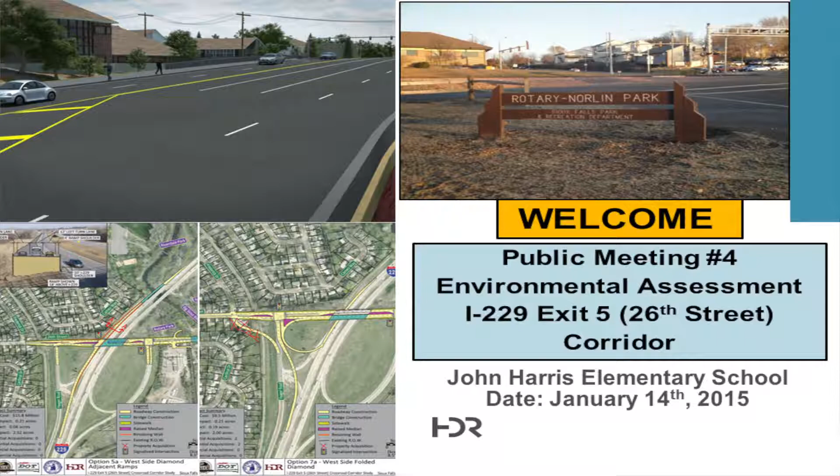Tonight's presentation isn't going to be as long as the last few meetings, but it is going to do kind of a recap of the process that we've gone through. I think in March, we began in 2012, so it'll be about 3 years. We'll kind of walk through the whole process, but the main goal tonight is to share the final findings from the environmental assessment and announce the preferred alternatives as we move forward.

Like Chad said, there are several folks here from both the city and DOT to answer any questions that you have. We are in the formal comment period for the environmental assessment, so if you do have a comment, certainly I'll take some general questions when we're done, but those comments we want written down because we have to respond to those. We'll actually write a written response to you and send you a letter with those, and also include it in the environmental assessment. So again, thanks everybody for being here.

I'm just going to hop into the timeline as a little refresher for everybody. The project began in March of 2012, and most of 2012 we did data collection, we started on the traffic analysis, and we had our first public meeting in the mid part of the year. At that public meeting we shared several goals, asked a lot of questions, and shared some results from the online survey that we had. But it was really our first time to get some feedback on an area of town that many people are frustrated with. So we appreciate everybody that's been here from our first public meeting.

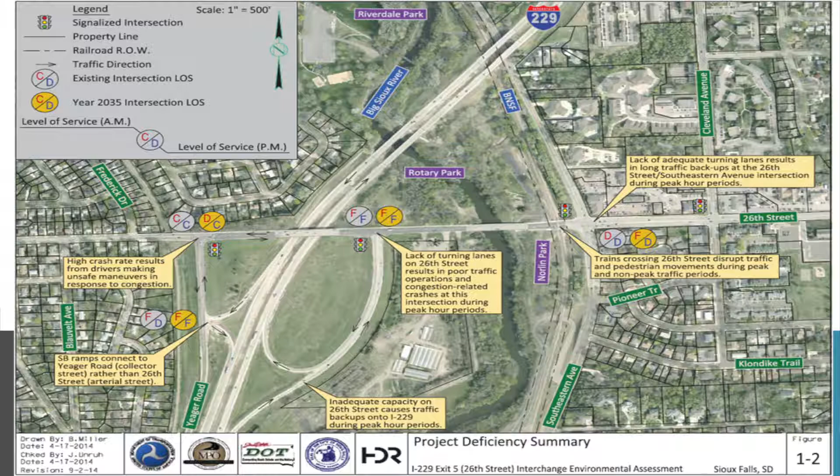In this location over here, we have one left turn lane that goes onto the interstate, the other one goes through. We have a lot of people jockeying since there's only 2 lanes to get through that area, so we end up having a lot of crashes. Some of that's due to the lane configuration, some of that's due to the congestion and capacity in that area.

So that was one of the items. Certainly the ramps connecting onto Yeager Road versus connecting onto an arterial. We don't have that in Sioux Falls. This is about the only location where we have a connection from an interstate system to a collector road. So that's something that we want to solve with this project.

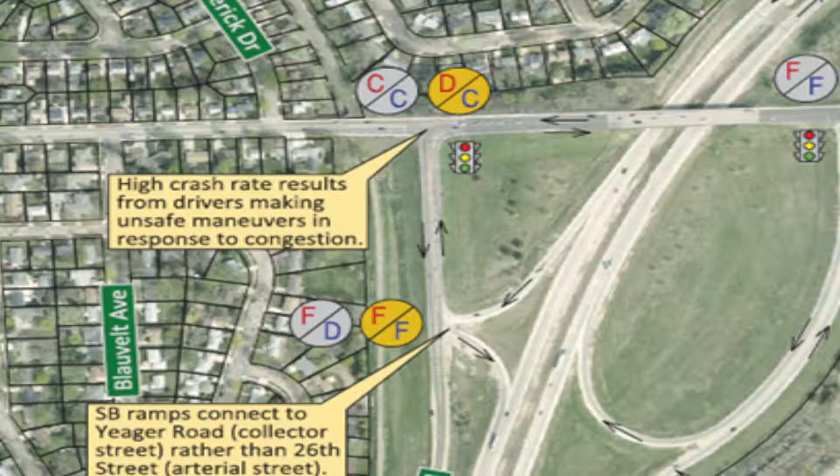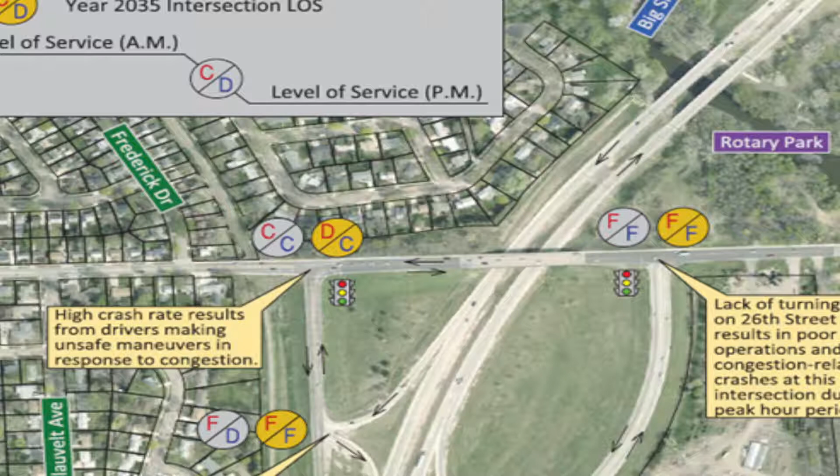Another thing that people see, especially in that evening hour, is the capacity on the ramp. If you're coming on 229, a lot of nights you see those lights all the way backed out onto the interstate, and that's something we need to fix. That can cause some serious accidents. So how do we manage and build capacity in this area, add the turning geometrics that we need to start clearing traffic off that ramp?

As we move over to the east, trains crossing 26th Street are disrupting traffic throughout the day. Certainly when they come and hit those peak hours, that's of serious concern, but they also come in other hours of day, disrupting that traffic. And I see our city traffic engineer standing back here, but if they come through in a peak hour, that can affect traffic operations for almost 40 minutes. So that's significant for people crossing that side of town.

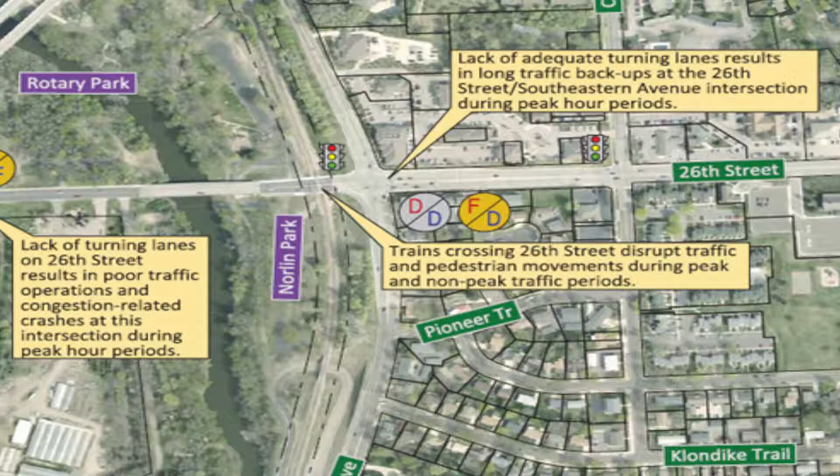And finally, as we look at improvements at the interchange, if we don't make improvements at 26th and Southeastern, it doesn't do us a whole lot of good. We need to make sure that as people are on that corridor, they can go all the way through as commuters and people that use the corridor and have a relatively safe experience going through there with additional capacity.

So from those deficiency summaries, we popped right into our purpose and need. We use those to develop what we need to account for with this project. So we'll walk through those: improve the existing interchange configuration, provide grade separation. As we talked about in the second public meeting, we need to satisfy these goals. They're not just put out there as we determine alternatives and create a new layout for this area. We've got to make sure that we satisfy these. So provide the grade separated crossing, improve traffic capacity at 26th and Southeastern, and finally, consistency with the long-range plan.

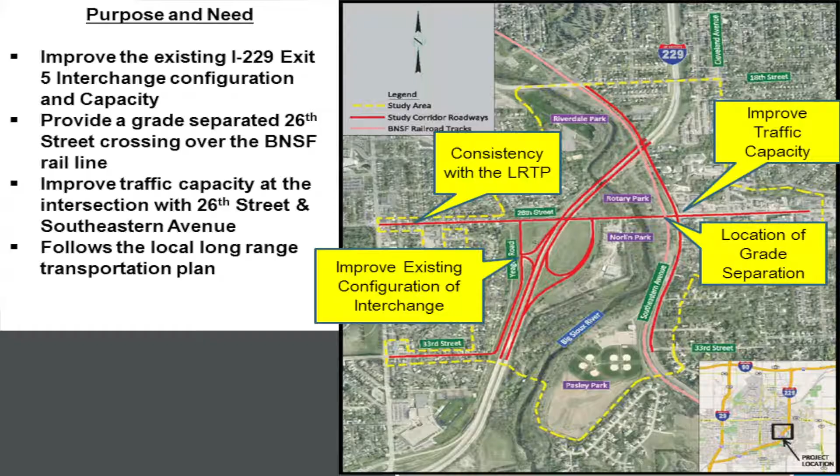And interestingly enough, we had a lot of folks come to our second and third meeting that were really wanting the extension of the 4-lane section over to Cliff and even farther through town. And no one disagrees that would take more traffic. But one thing the city does is develop plans on where roadway improvements should take place and where they might be detrimental to housing. This is an area that really starts over on Kiwanis Avenue and comes all the way across on this corridor, and they identified this as a location where they didn't want to create those 4 lanes for the sake of the single-family homes along those corridors. So those are our main purpose and need statements. We're going to keep going.

At our second public meeting, we brought those options forward. We had 13 options that we brought forward, and after the meeting, from the comments received from the public and off of the website, we created 7 additional concepts. So at the end of the day, we evaluated 20 different options against each other at the interchange. Quite a few, common for a project like this when you're looking at all the potential fixes out there. At 26th and Southeastern, we brought 6 options to the public at that meeting. We didn't have any new options come out of it, but we did have quite a few refinements based on comments from the public, so we appreciate that.

Evaluation of concepts stemmed around these items in relation to the environmental assessment. The purpose and need. As we created this matrix, and this is just a small caption of what it actually is, it's a long page where all of them are compared against each other: is the interchange standard for this area? Are future traffic needs being met? Is grade separation in accordance with the City of Sioux Falls policy? Is the option consistent with the long-range plan? How are property impacts taken care of out here?

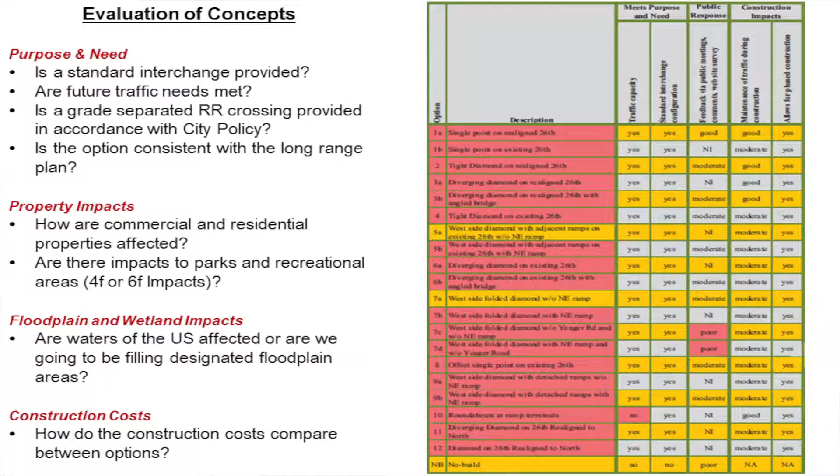At that same meeting in February, we talked about alternatives that were going to be carried forward. And this is kind of the first time you'll see on the layouts here tonight where you're seeing a mix. We have 5A and A. What that means is we've combined the interchange layout of 5A along with the intersection layout of A. As far as the environmental assessment, we need to make sure that we see the full picture. And we did that, and these boards show you those options together.

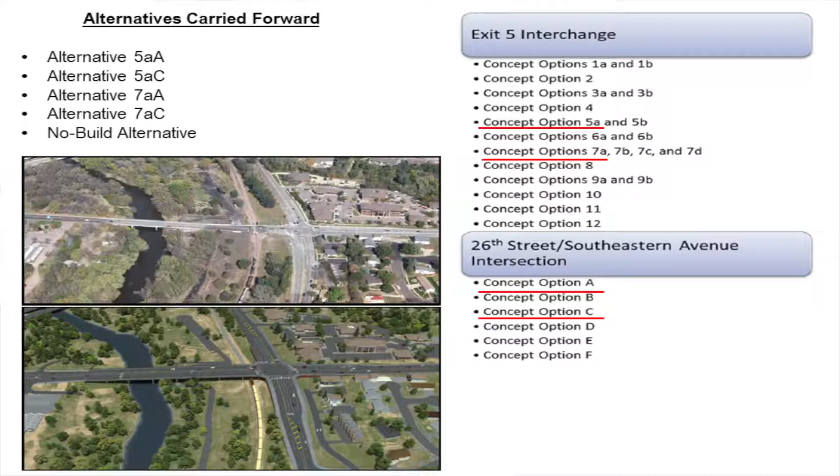From that meeting, we carried alternative A, 5A and 7A from the interchange, and we carried from the intersection A and C. As we go along, we're always considering that no-build alternative, as that may be the alternative if we can't find a solution. So underlined in red, these are the ones we carried forward. Now I'm just going to quickly run through the benefits and the drawbacks of the options. These are just captions of the layouts that are over there.

This is 5A and A, so this represents our west side diamond interchange where we have the ramp that begins and is elevated by Cameo Way, comes up to the intersection here, and then the ramp goes back on to get to the interstate. This side is relatively the same. We didn't recommend any improvements to this long ramp because we need that length to receive the dual left turning movements that we'll have at that ramp. So we didn't look at consolidating it because we need that length for the 2 lanes to merge to 1 as they go on to the interstate.

But just a few benefits. Certainly this one will serve the traffic demands that we have forecasted and what are existing. These options, specifically because of the longer bridge we're using, have minimal impacts to the Big Sioux River floodplain, actually some improvements, we'll talk about that. We have minimal widening west of Yeager Road, and we point that out in regards to consistency with the long-range plan. And this option allows for grade separation over the railroad. So those are some of our benefits.

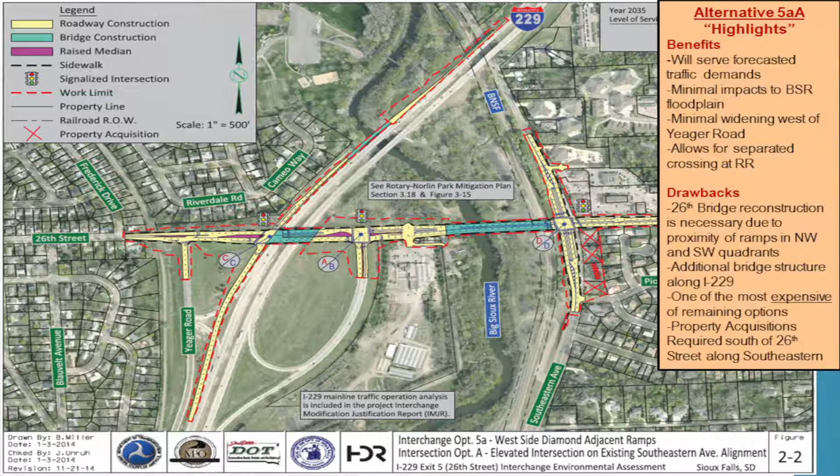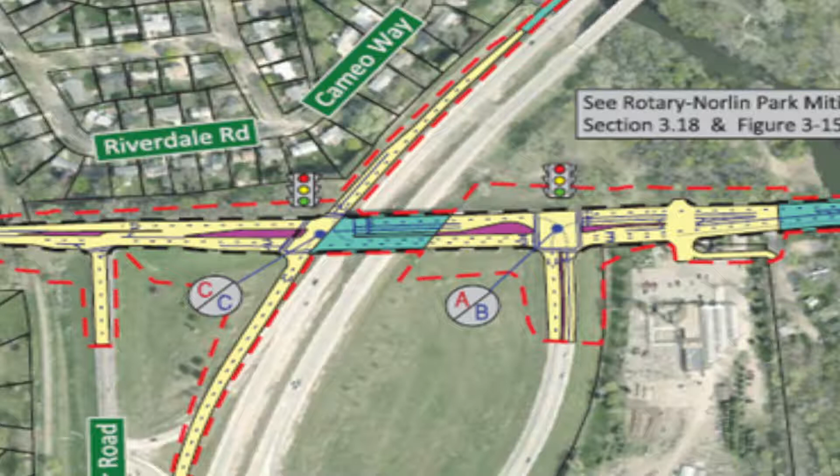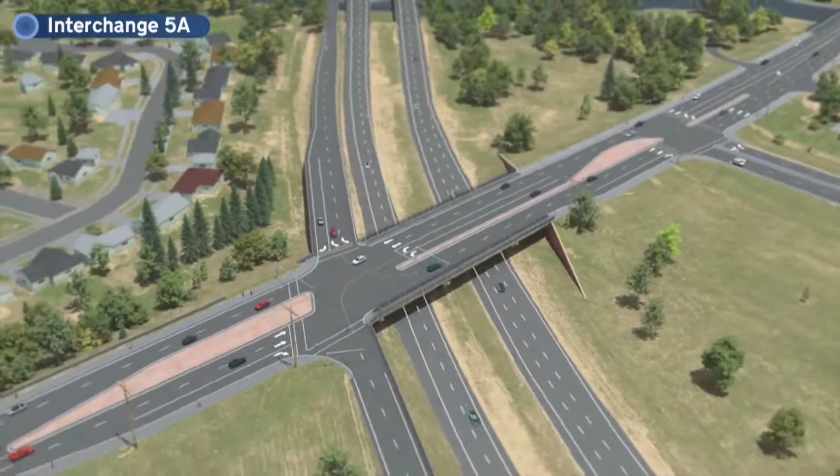Some of the drawbacks, and they relate back to cost, but this bridge right here in 5A, we have to totally reconstruct that bridge. It's not that old. Certainly when we do these projects, we try to expand them if it's a type of bridge that we can expand. But with the angle of the ramps and how they're tied into the bridge, we can't make that work with the existing bridge, so we need to replace it. The other item is the bridge that we need to construct here over the Big Sioux River. We're calling them drawbacks only because they increase the cost of the project. So when we look at the screening matrices in the comparison, that's a big cost.

I'm just going to go through. When we look at the bridge location here up to the interchange, if you remember from the last public meeting, this was kind of the wall. I don't have it up here as a drawback really, but for the folks along Cameo Way, if this option were selected, this is the view that they had. We had concerns with drainage going down the interstate right-of-way. Certainly visual impacts were concerning to them. So we had some other issues if we went with this option due to this wall.

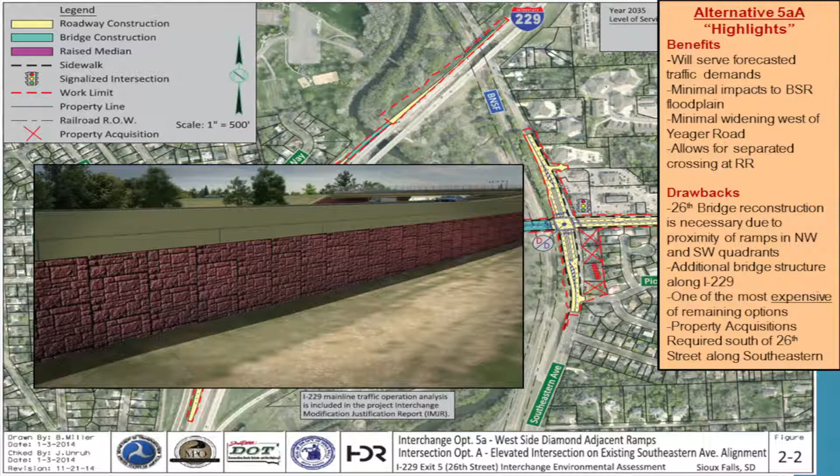And finally, certainly a drawback to any option is if we have property impacts. In alternative A for the intersection, where we keep Southeastern on alignment, we have 2 commercial properties that would be impacted and about 7 other residential properties that would be impacted. So those are certainly drawbacks.

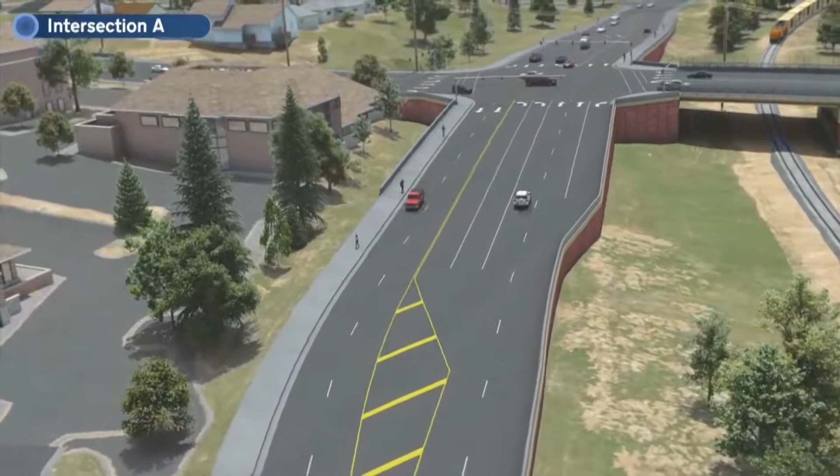We're going to go on to option 5A here. Anything that we talked about on the last slide is consistent, but now in this option we're looking at alternative C, where Southeastern is off alignment. It's pulled closer to the railroad. And so a couple items here. This top one is certainly true.

Forecasted demands we meet. Minimal impacts to the floodplain, again, because of how we looked at the bridge design. But we looked at another benefit as being redevelopment opportunities in this southeast quadrant. And the other thing is the additional separation that we get to these businesses. I'm going to stop this at a few locations, but this is the animation for intersection C, and I want to point out why we believe they're benefits.

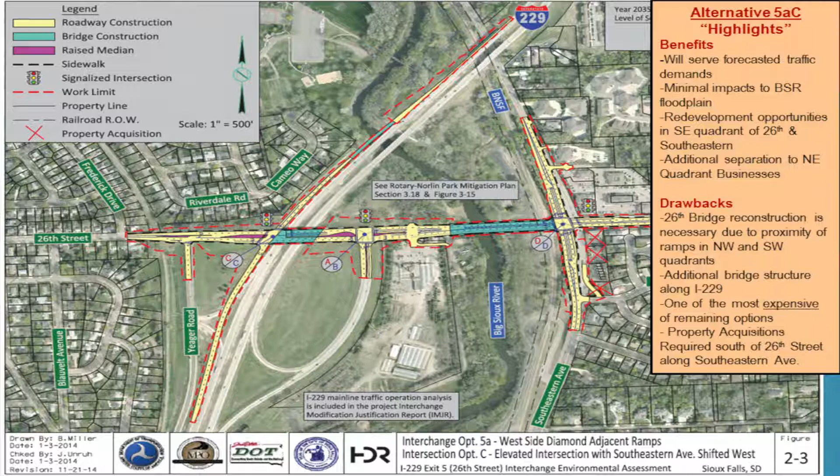Okay, at this location specifically, in option C, we create a large amount of green space. If you're the business owners in here, on option A, that retaining wall runs right along their property. So when we create additional space in here, we can also adjust some of the visual impacts. By providing additional green space during preliminary and final design, we'll look at reducing these walls, making it so the road doesn't appear to be right on top of those properties. That's a benefit. Now we'll keep going and talk about the other quadrant.

Okay, I'm going to stop it right here. At the last public meeting, we talked about the benefits of alternative C, being able to provide access to all of these properties. That was one of the benefits we had. As we go through the process and start carrying forward alternatives, that's really where we take additional time to dig into all the other things we need to take into account.

One thing we learned as we got into the carry forward stage is that we have a sanitary sewer line that runs down 26th Street. With a fill of about 25 feet in this area, we don't want the sanitary sewer in that location because we'll never get back to it. It'd be very difficult. So we needed a place to put that sanitary sewer, and the only available option was to come through this area. That was an impact we didn't anticipate right away. We thought we'd be able to keep all these and build the walls, but as we looked into utilities, that wasn't the case. So we started thinking maybe we won't be able to save these commercial properties like we originally hoped.

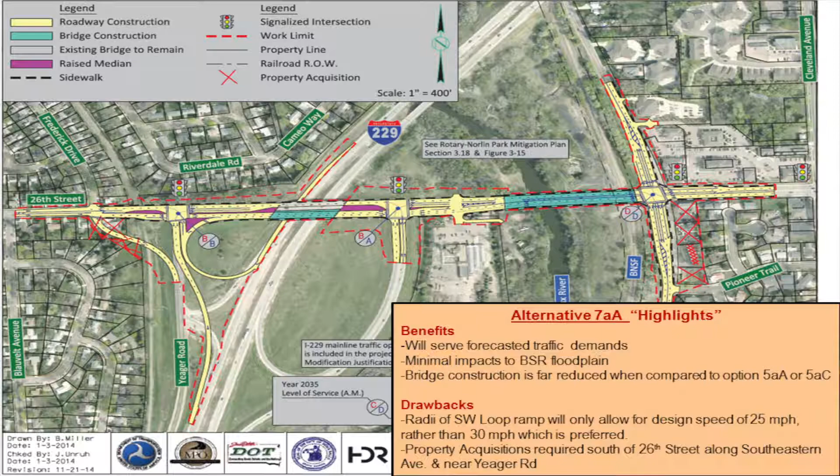Some of the drawbacks of this design, and we talked about this at the last meeting, is the radii of this loop. We say it's a drawback primarily because if the DOT were in a rural area and had the opportunity to build the interchange exactly how they wanted, they'd make that loop a little bit bigger.

Okay, we're in an urban area, we got homes, we got all these things that we're trying not to impact. And they're very common to be this size and even much smaller. Rice Street, the ramps up there are much smaller. Various areas around town they are.

So one thing I just kind of wanted to point out is this yellow portion here, that's the ramp that we're looking at. The orange portion is if we increased it to 250-foot radius versus the 190. And what happens is we start getting in with the Yeager Road relocation, we start getting into more property impacts in this area. And we don't have any information that would indicate that that ramp would really work better than the one we're proposing.

And we've done a lot of study on it and worked with the DOT. So we're comfortable it'll work. Certainly, by keeping it tight, we have less property impacts than we would if we widened it out. But the other drawback is by making this connection with the Yeager Road, we do have two property acquisitions that are required here and two partial acquisitions. So that's certainly a drawback.

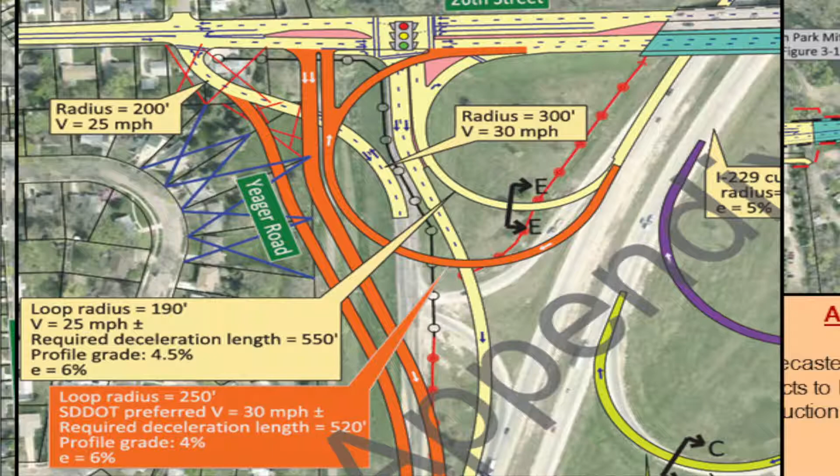Alternative 7AC, so all of the items that we talked about still pertain here. And really everything we talked about in the last option in 5AC pertain here. So this option, no different. We still have really just the condos that would be able to stay in that southeast quadrant.

Now I'm just going to kind of take you back and say, okay, how does this all fit together? Well, in relation to the public meetings, public meeting 2, we announced that the project was being transitioned from a corridor study into an environmental assessment. And that's something we didn't know when we had public meeting 1.

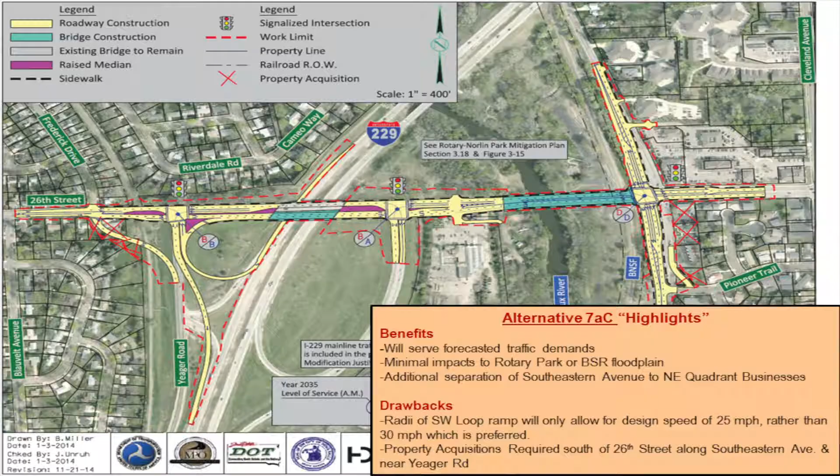And the reason for that is the city and the DOT knew that they wanted to begin with improvements shortly after the study. And if we'd have done a corridor study and completed that, they basically would have had to start again on the environmental assessment. So they kind of just changed things up and we took off with the environmental assessment.

So at public meeting 2, the items that we covered were the approach and scope. We brought a purpose and need statement, and we showed you alternatives. So that was kind of the first steps as we build up to completing the environmental assessment. Public meeting 3, that's where we came back with the screening matrix and talked about the evaluation of the concepts. And so finally with public meeting 4, we're at the selection of the preferred alternative. And so we're kind of getting to the top of our pyramid here.

Really, we'll take the comments that everybody has from this meeting during our comment period of the environmental assessment. We have to ensure that we respond to all those. And then finally, we would ask for signatures from DOT and Federal Highway for the final approval of the study. These are just some environmental assessment summary boards. For alternative 5AA, we have 7 acquisitions, 7 residential and 2 commercial.

Noise, we spent a great deal of time with noise. We had our noise boards in the back at the last meeting and kind of went through those in great detail. But if you want to talk about the noise, certainly grab me afterwards and we'll go back through it. But what we found out is in this area, due to the urban nature, the noise really wasn't changing.

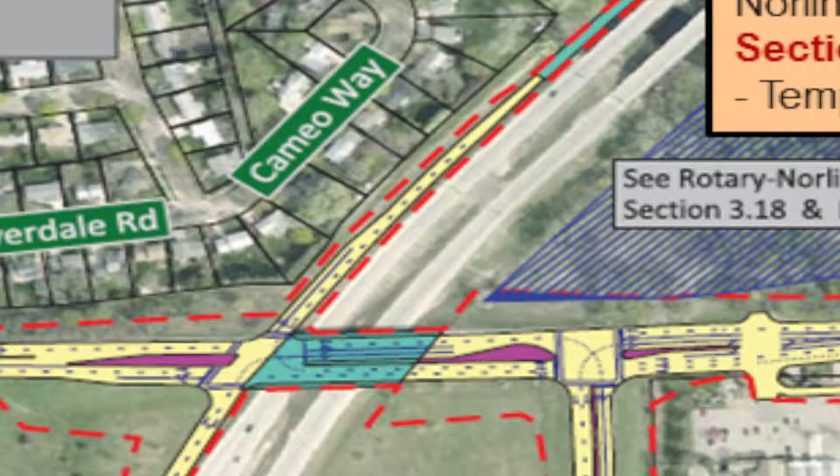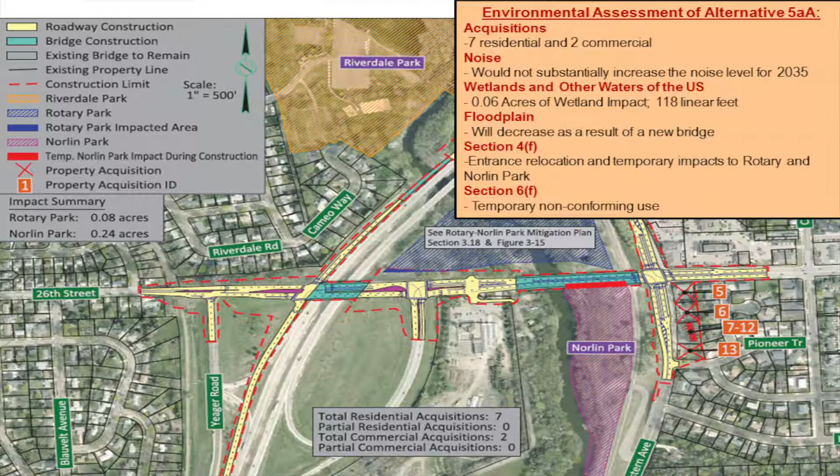Floodplain impacts, wetland impacts, as we go through the slides, they're all generally similar because they exist in this area where the options are almost identical between the two. Section 4F, as we finish this, I'm going to get into our park mitigation plan, and that's the Section 4F, that's park uses. In Section 6F, we show temporary non-conforming use, and that would be for the recreational trails. And why we say it's temporary non-conforming use is really we're going to disrupt it to some extent during construction, but when the whole project's done, the trails will still be in place.

On our board, you'll notice that during construction, our plan is to place a box culvert that would start over here and go over here so you could ride through the project safely while they construct over the top of you. And those are things that allow us to get that temporary non-conforming use. So that's a good thing.

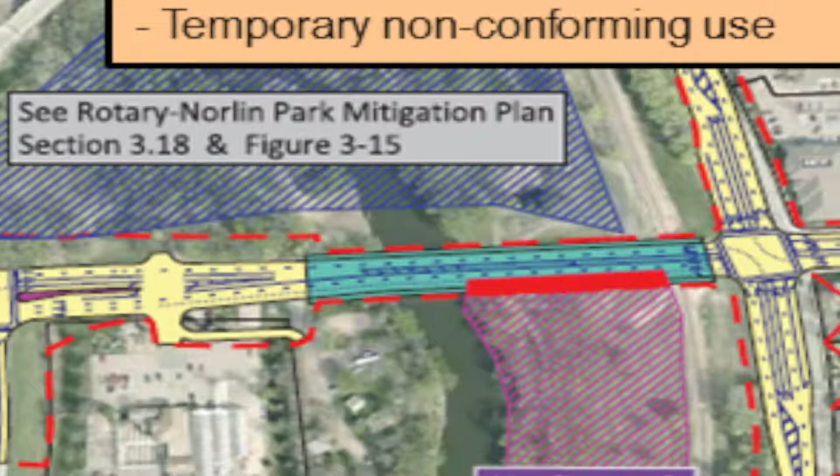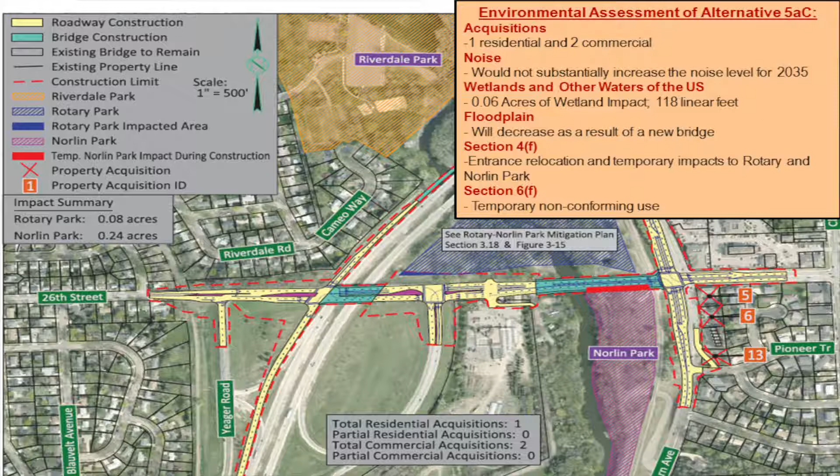5AC, really not any other differences. You know, we have just the less acquisitions, but all the other stuff is basically the same. Now we get to 7AA, and again, the major obstacle here is the acquisitions between the residential and the commercial. The other options are similar in nature based on this configuration versus existing.

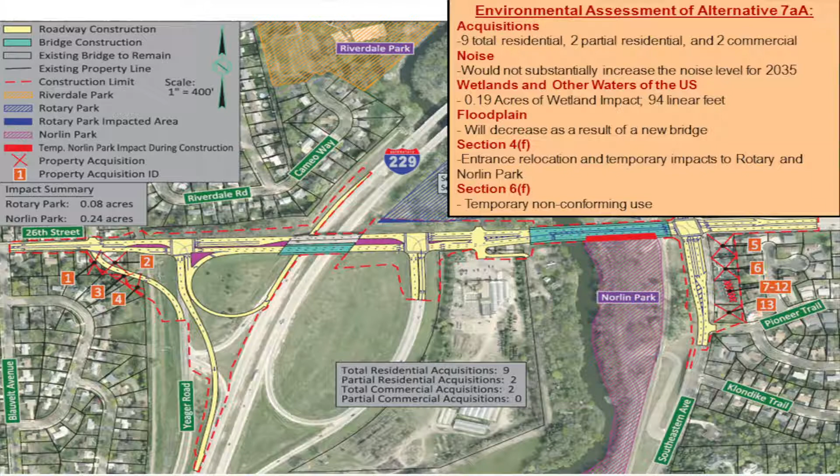We're not having a great deal of noise differences, and it kind of makes sense. I mean, everything's still kind of consolidated in the same area. And on the north side here, we're really only looking at adding a little area along the interstate for deceleration for that loop ramp. That's about it there. And same here, the acquisitions, certainly in 7aA and 7aC, we have more than in the 5A options. But again, that's kind of the summary of the environmental items.

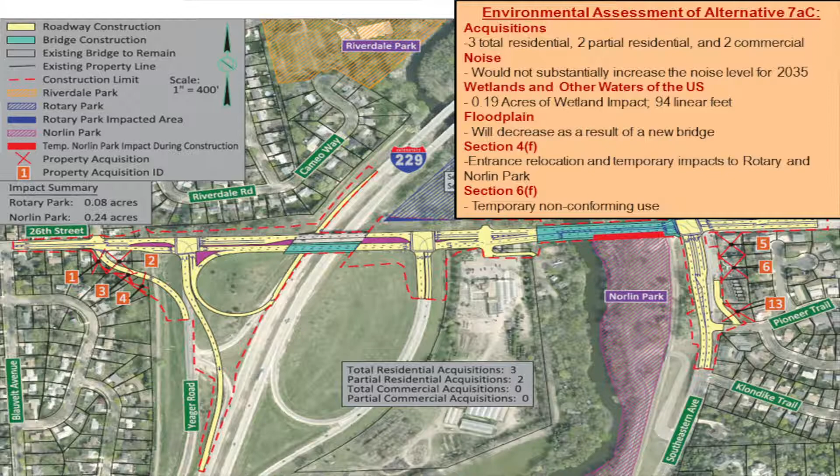In regards to analyzing 4F, I know we had a lot of folks ask questions in the early part of 2014 after our study. It's like, well, when are we going to see you again? And boy, it's been a year since we've seen everybody. And so this 4F impact was one of the largest things that we had to overcome with the project, and trying to figure out how to handle if we're going to build grade separation on 26th Street over the railroad, and we closed the park entrance. You know, how do we fix that?

And so that took us a long time working with the Parks Department, the Parks Board, the Parks Committees, as a group with the DOT City. It was difficult to get a plan that kind of put back what was there. That was our goal, not to maybe do all these enhancements, but really to give them the park similar to what they have out there now.

So, as far as the 4F process, we identify the properties within the study area, Riverdale, Rotary, Norlin, Pasley, and the Big Sioux River Trail. Then we go through and identify the impacts. What we found to be the impacts were really the park entrance issue and then our temporary construction impacts. And so we have to figure out how to work through those. So we develop measures to mitigate or minimize, and that's where we come up with the Rotary-Norlin Park Mitigation Plan, and we'll pop to that next.

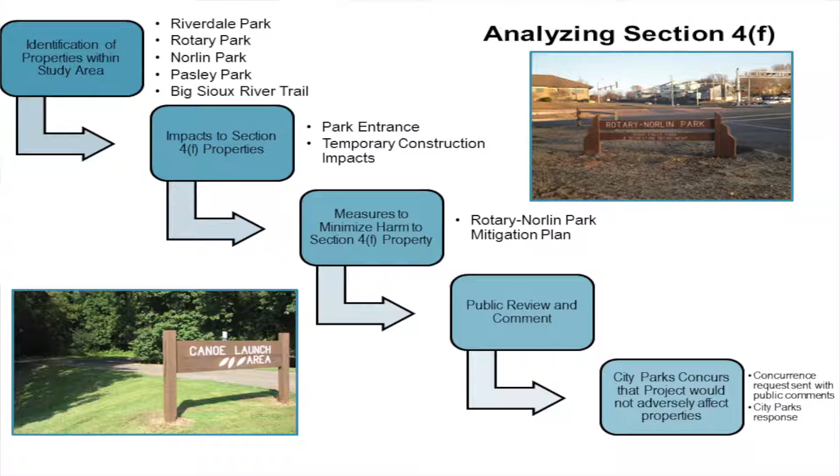But tonight we'll certainly review and comment on that plan, and those we'll certainly share with the Parks Department. They'll be happy to hear those. And finally, we're looking for that park concurrence, and so far we've got approval from the park board, the park committees, and finally we're waiting for just kind of a final reassurance from the public that we're on the right track.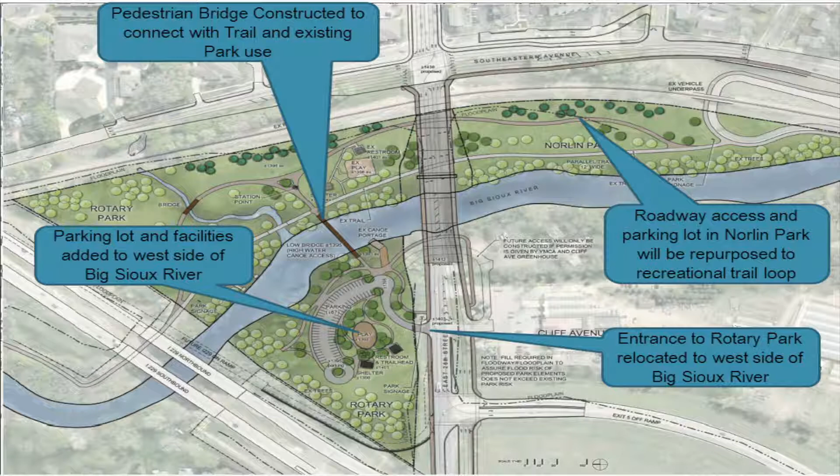Some of the highlights from that mitigation plan, just to orientate you. 26th Street here, Southeastern Avenue right here. This is the location of the existing entrance at grade, right at the railroad tracks. And really, there's no way to come from 30 feet in the air and get down into the park. If we even built a ramp, we'd eat up all the land that exists. And so we said, well, this is Rotary Park. We're not creating new Rotary Park. This has always been Rotary Park. The current use is really for the canoe area.

And so we had a sub-consultant that works on a lot of park master plans. I got them on board, and they really put their hats on trying to say, okay, how can we put back what we're going to take away? And so they developed a plan where we're looking at relocating the entrance across from Cliff Avenue Greenhouse. And as a traffic engineer, I love that because we're not so darn close to the intersection up here. It's in a much better spot. And so people can get in.

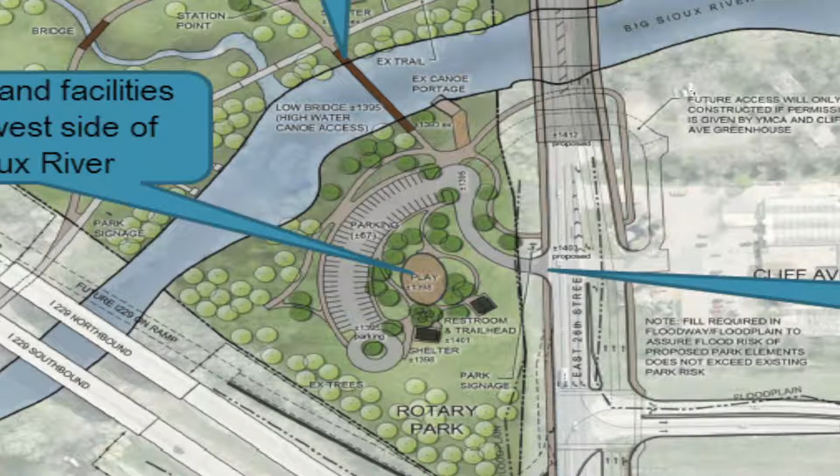We'll allow to have the same amount of parking that exists out there now. There'll be the playground, restroom, and shelter facilities, no different than are on this side. Even when our project's done, these uses are going to stay over there for the foreseeable future. If they last 20, 30 years, a lot of people play on those. If you go on the trails, man, it's just solid busy all the time.

So if you want to get from the parking area over to the trail, you're going to get there over a ped bridge. And this one will be a little bit different than some of the ones that are in town. If you ride on the bike trail quite a bit, you notice that the bridges kind of go way up and they come way down. And they're doing that to make sure that they don't infringe on the area needed for the floodway.

What we're looking at doing here is putting a lower bridge in, something that if you drive across, you don't come right down onto the path, because we had a lot of people that said it just seems like you're always shooting down off those paths. And so we did some research and found some bridges that we can build within the floodway and have breakable-like railings on them. And so they would close if we had those higher events. The railings could be expanded so they don't block flow. And so I think people will like that. That's done in a lot of cities around the US.

So some other items, one thing we talk about is repurposing. Right now, if you come into the park, there's a parking lot here, and then there's a road that takes you down to additional parking on Norlin Park. And so we also got to figure out, we replaced the parking over here, but how do we repurpose that other roadway and the amenities on Norlin? And we did that by adding a secondary trail. And those of you that use this path know how busy it is. So in this area, it'll be very nice to be able to either go right on through or maybe spend a little more time in the open green space at Rotary Park off that secondary trail.

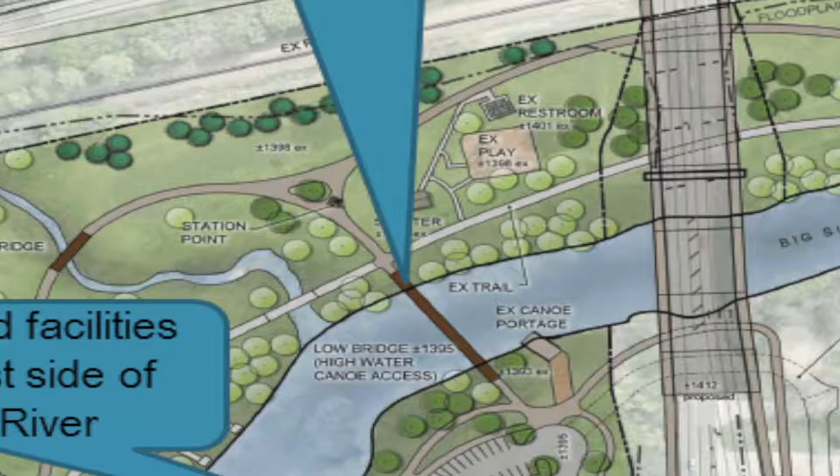And so we have a board in the back that covers all of the items with the mitigation plan. Certainly can go over those with you, but we believe that we came up with a good alternative for really mitigating some of the problems that we created with our design, and we think it's a win-win.

So finally, we're down to the selection of the preferred alternatives. We'll start with the interchange. The preferred alternative is 7A. In comparison to the no-build option, we certainly have to look at that. The no-build option does not meet the project need. It doesn't provide a standard interchange configuration, and we're not relieving the traffic congestion that we have out there.

The interchange alternative, just some bullet points here on the benefits. The construction cost is about $6 to $6.5 million less than alternative 5A. So when we look at construction costs, like I said, if there had been $1 million between the two, it would have been negligible. But when you start looking at 5, 7, some of the interchange options were $15, $20 million difference. Then it becomes something that we need to consider in our alternative selection.

The southbound off-ramp allows for free right turns. This is a benefit if you get off the interstate and you want to go eastbound. Right here, you won't stop to get into traffic. You'll actually enter your own lane. And so when we look at traffic capacity between 5A and 7A, we have just a little bit more under this option, which is kind of nice. And that third lane will continue all the way over to Southeastern.

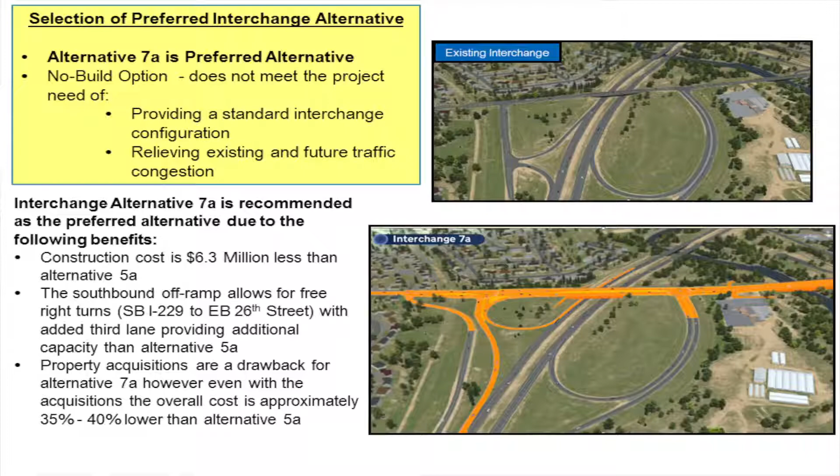Now we're going to hop over to alternative C, which is the preferred alternative for the intersection. Again, against the no-build option, we're not following the city's policy for grade separation at this location, so we're not meeting the purpose and need. And then the intersection capacity, we can't improve it at grade. We can add right turn lanes and some of those things, but it's very difficult to do that in the constraints that we have.

Again, some of the benefits, we do allow for redevelopment, and so if we do have to have takings, we certainly want to be able to put something back there. And so this allows us to do it by redeveloping this part of the southeast quadrant. And like I said before, impacts come from construction, staging, utilities, access, visual, just many different things that we looked at in that area.

And also this provides much better separation with the existing businesses. And at the end of the day, we didn't change their access. And when we met with those folks, that was the biggest thing. You know, they want to make sure that their patrons that come off the interstate can get to their businesses just like they do today.

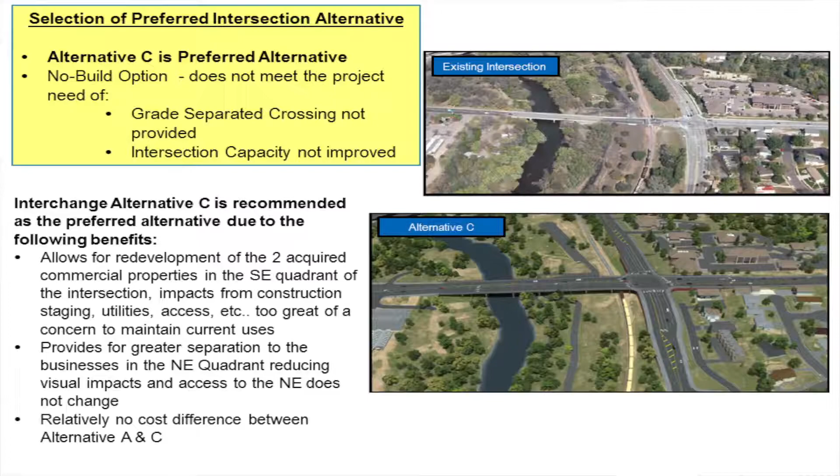And finally, I'm just going to touch on the traffic sequencing for the project. I had a lot of folks, a lot of business folks come up to me after the meeting last time, and they were really concerned about whether this project would maintain traffic on 26th Street. And I'm telling you, we do not have all the answers, but we did look pretty hard at just 26th Street. And so we'll just pop through a couple of the cross sections.

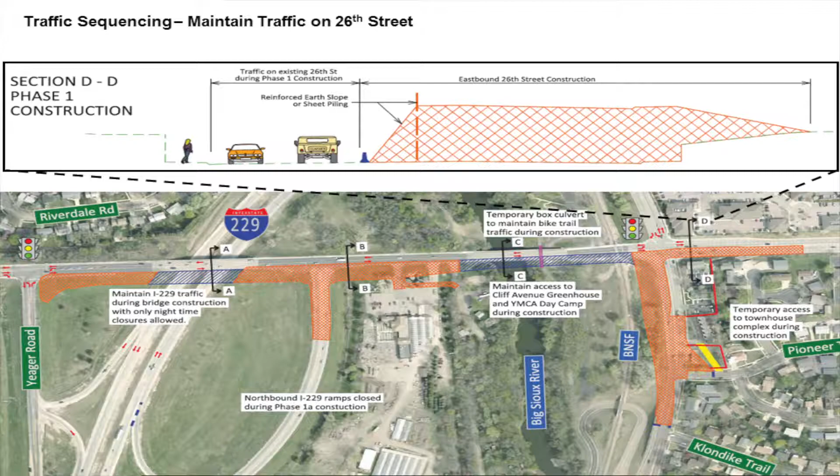And finally, comments. Like I said, we're in the stage of the environmental assessment where it's out for public availability. And so what we really want you to do is draft a comment, either leave it with us tonight or send it back to us. Our forms are longer this time, so you have more room to write on. We'll take those. We've got to respond to each one. That's protocol of the environmental assessment. We will send you a letter back indicating how we addressed your comment. And we need to do that before we can move into those final stages. So please do that.

By the end of the month, that's when we're looking at getting comments back. That way we can continue into February, address those comments, and finalize this part of the project. And like I said, the next project would be actually moving into design.